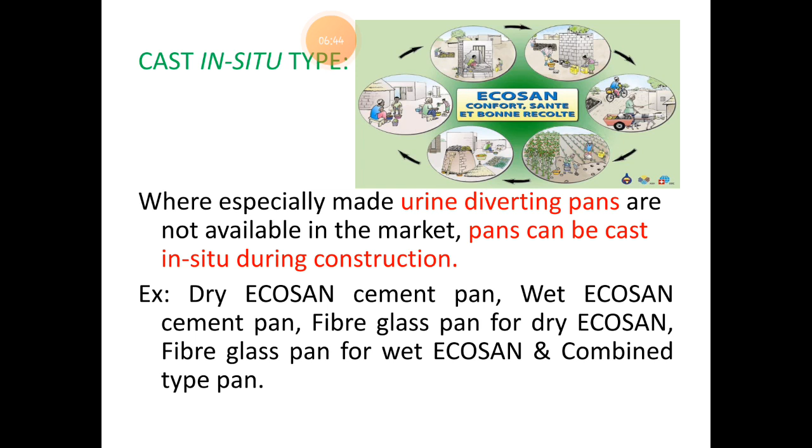The next part is the pan cover. It is used to cover the holes for urine and excreta collection. The cover is placed mainly to prevent fly breeding, control the smell or odor, etc.

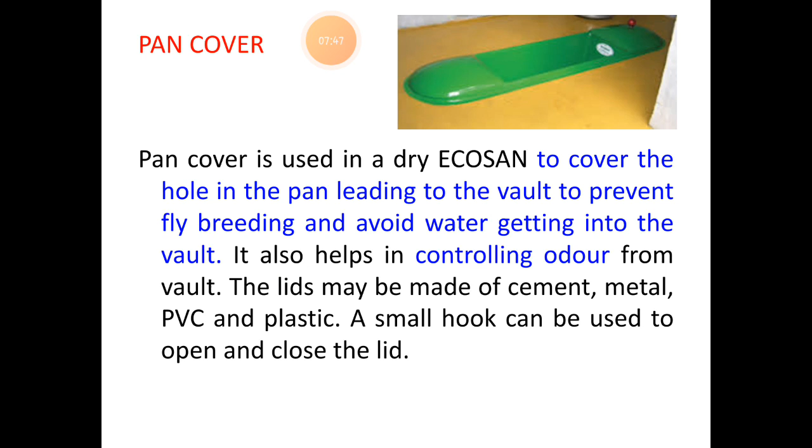The next part is the collection tank or collection chamber. Students, this is the part which differs from the conventional toilets that we usually use. The fecal matter or excreta is collected down from the excreta hole of the pan. It is generally constructed above the ground for easy disposal, and this container could be a bucket, a plastic can or a plastic tank, which after filling is taken to the biogas digester or plant.

Along with cow dung, the human waste is mixed and fed into the digester to get biogas, or natural gas, after decomposition by anaerobic microbes. Also, the manure or compost that we obtain is a nutrient-rich soil called humus, which is formed and removed after the biogas is utilized. And it is widely used as manure for agricultural fields as it is nutrient rich.

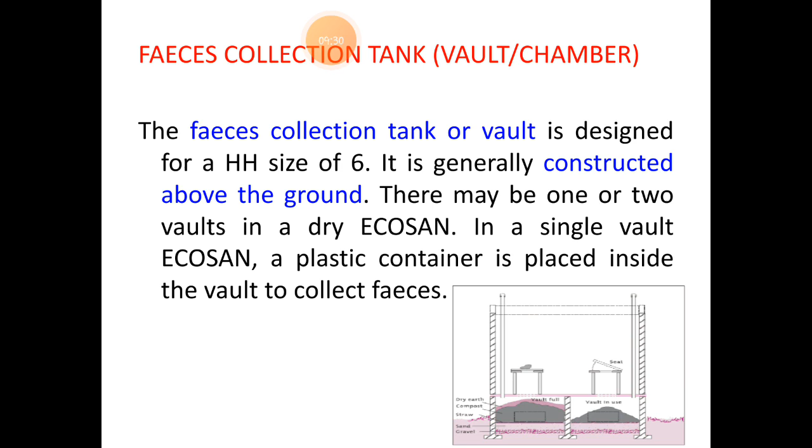Students, here in the picture, you can see the collection tank fitted with a vent pipe. Okay, the bio-toilet with the collection tank and a vent pipe also. The next part of the EcoSan is a vent pipe. It is a common part of both the EcoSan toilets as well as the conventional toilets that we make use.

You might have seen a long pipe which is placed vertically attached to these toilets, which is either made up of PVC pipe with a cowl or a cap on the top, which circulates the air inside and reduces the odor or the smell within the EcoSan toilets.

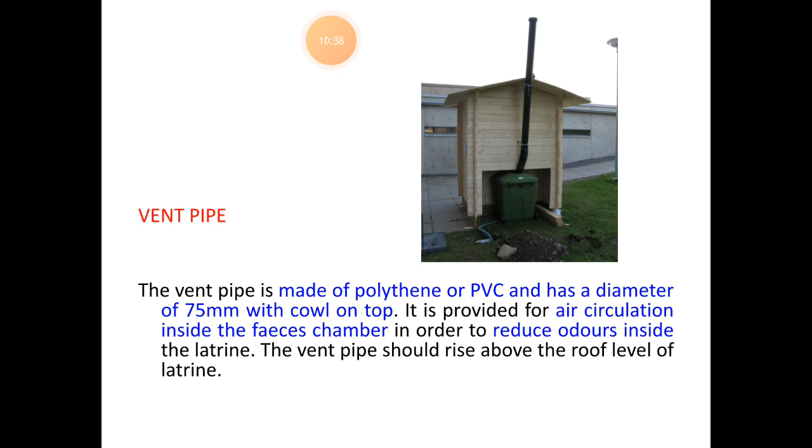The next is pipe network and collection tank. Students, here in the picture down are two collection tanks, one for the urine, another one for the feces separately. Both the waste are collected separately in a plastic container of 100-liter capacity usually. Why do we make use of plastic containers? Because it prevents the loss of nutrients.

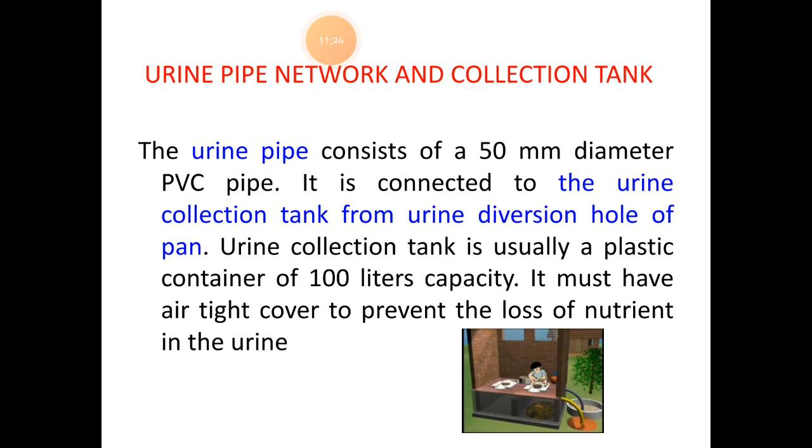Next is the feces emptying door. This is the opening for emptying the tank of excreta. It is generally a concrete slab or a slate or a wooden plank or even a transparent PVC sheet. Here, the first part of the picture down is the squatting room, and the next part is the fecal chamber covered with a slab.

The slab is covered again for the same reasons of preventing the bad odor expelling from the tank. The second is prevention of the vector flies and their breeding into the chamber down there.

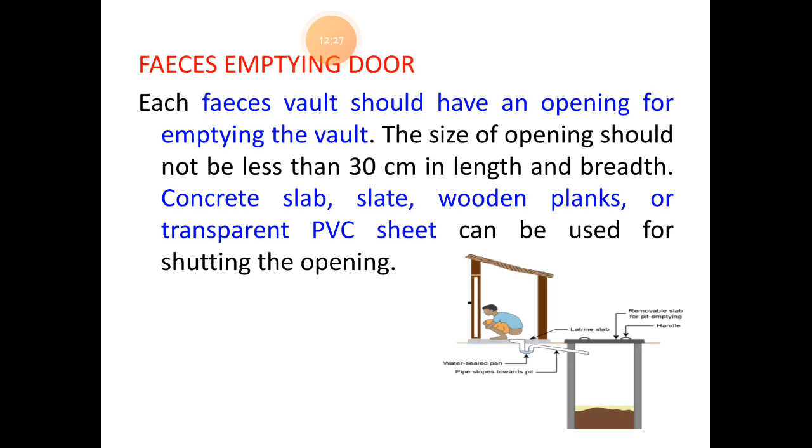Students, there are two major types of EcoSan latrines. One is dry EcoSan pit toilets or pit latrines, which separate the urine and fecal matter in different tanks. Also, there will be two squatting pans in each toilet, as you see in the diagram here. The first squatting pan is continuously used until the collecting tank down gets filled.

Later, the next or alternate squatting pan is used, which is attached to another set of collection tanks for the urine and the fecal matter. By the time the second tank gets filled with the fecal matter, the first tank content, that is the excreta, gets converted into compost and manure, and this compost is removed from the first pan and utilized for the agricultural field.

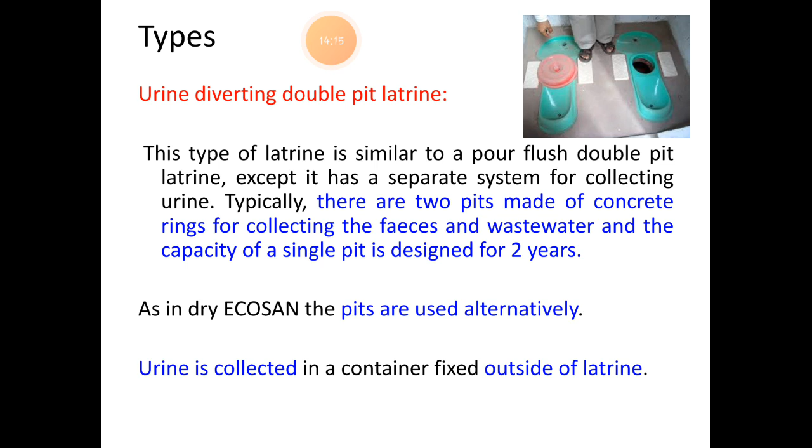Whereas the urine tanks, once filled, are made to evaporate the volatile compounds, and the leftover water is utilized for the agricultural plants. So this is the importance of the dry pit latrines. The second type of EcoSan toilet is biogas plant attached latrines. I think you can see it in the picture here.

The squatted waste is collected directly and it is connected to the biogas plant or the chamber. Along with the cow dung, it is fed to the digester there. So after the filling up of this excreta in the biodigester, the biogas is produced by the activity of anaerobic microorganisms. Manure and compost formed within the digester is removed and used for the agricultural field. Biogas obtained is used for household purposes.

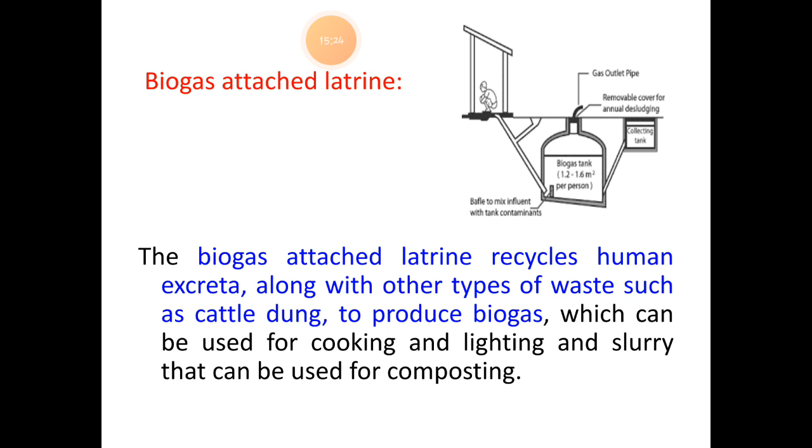Well, students, the working of EcoSan toilets depends on the following important factors like dehydration, decomposition efficiency, aeration, and temperature. Looking at the dehydration factor, lowering of moisture content of excreta is done at this stage. It is usually done by the evaporation of the moisture by adding ash, sawdust, husk to the pit or the tank.

Whereas for the decomposition or composting efficiency, compost refers to a complex natural biological process in which the excretory organic matter is converted into fertile manure, which we call humus. And it is done by the action of aerobic microbes. The process depends on internal factors like oxygen level, temperature, moisture, pH, carbon level, and even the concentration of the microbial population within.